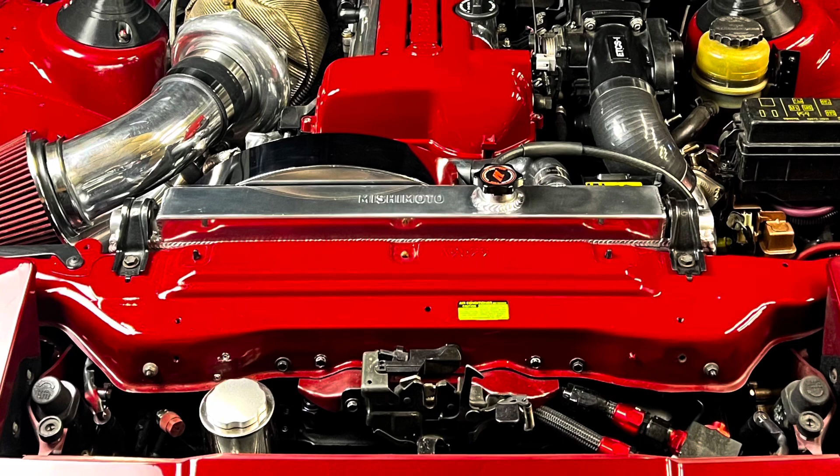When planning my ultimate Supra build, I struggled with balancing the nostalgic and original design of the car and adding newer amenities. My goal is to take this car, make it reliable, fast and fun, and also keep the feeling of a comfortable grand touring vehicle.

Keeping the factory air conditioning, making oil changes a breeze, and cooling the oil equally as well as the factory Aristo oil cooler did.

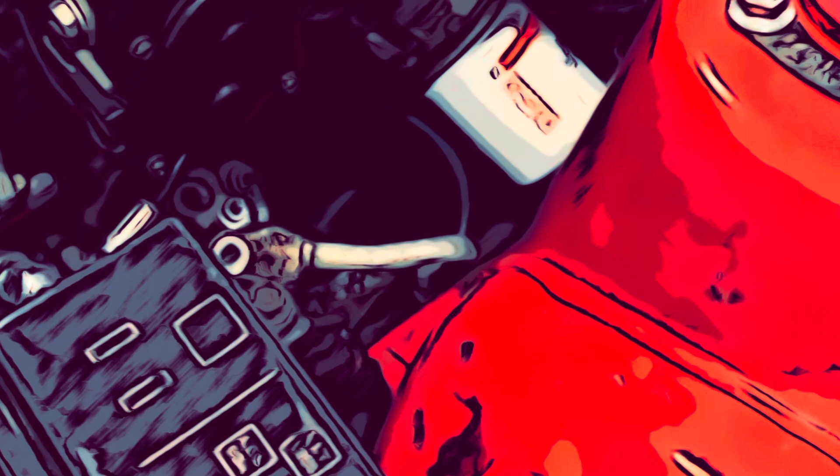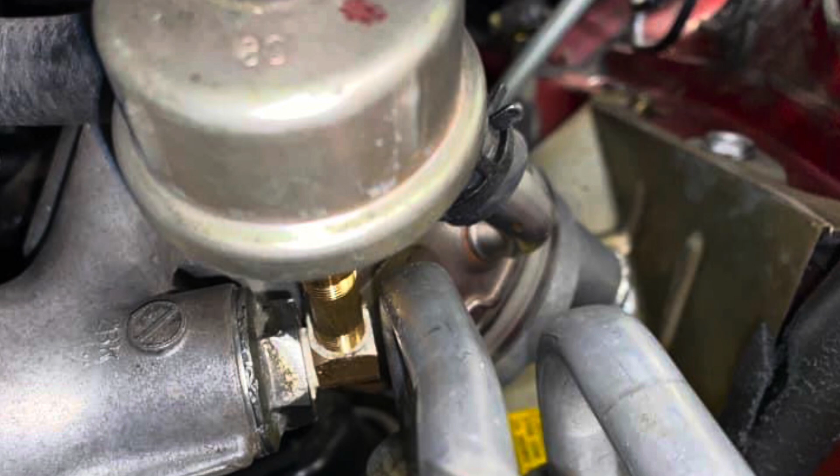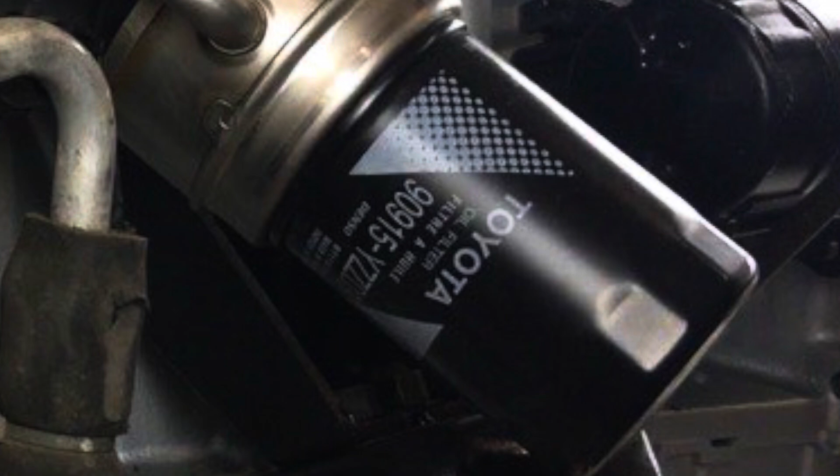When planning the 2JZ swap and looking at the factory Aristo oil cooler, I could see there was going to be a little bit of conflict with space in changing the oil with the oil filter, running the AC lines, and just having room to work in this area. There's also a guard for the steering linkage that the filter butts right against. Pair that up with using a slightly larger than factory oil filter to get a little better oil filtration, and it's just a recipe for frustration and oil spills all over the place when you're doing an oil change.

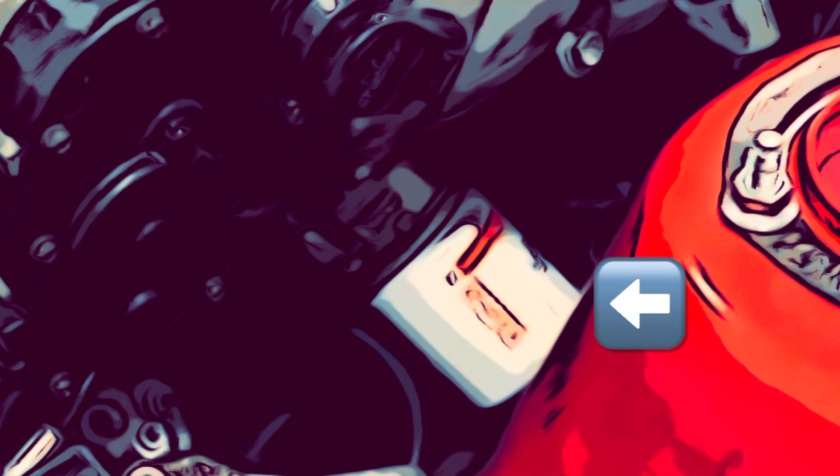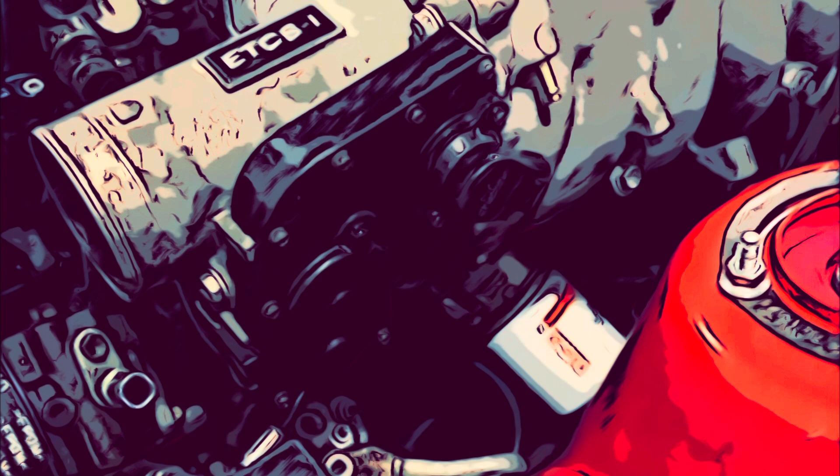This oil filter might look like it's really easily accessible, but what you're not seeing here is the power steering fluid reservoir and other wiring and hoses that are in this area. It really just doesn't look very inviting to me.

I just want to make this vehicle really easy to maintain and enjoyable to drive overall. So now I have to put my thinking cap on and try to make this build as reliable as possible.

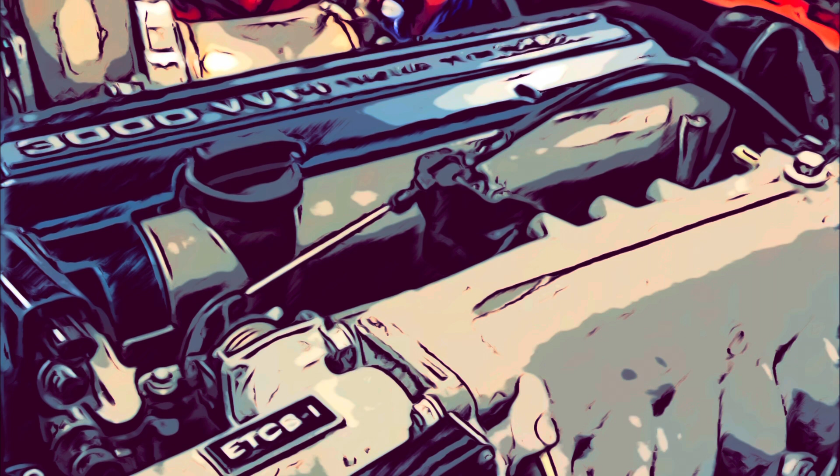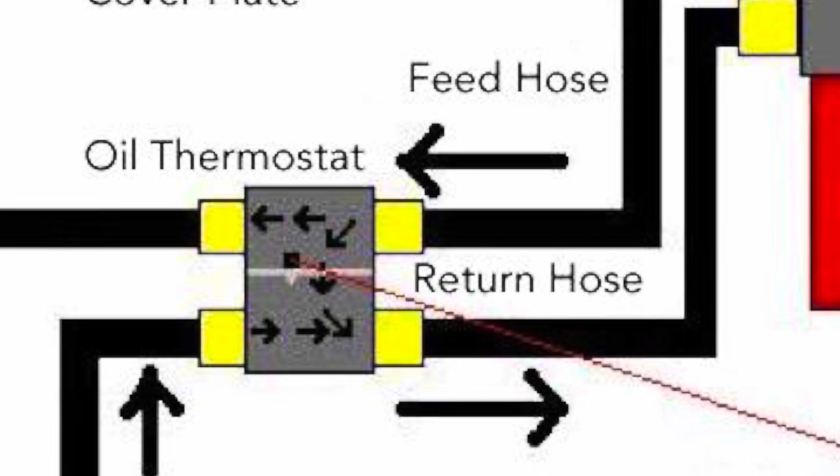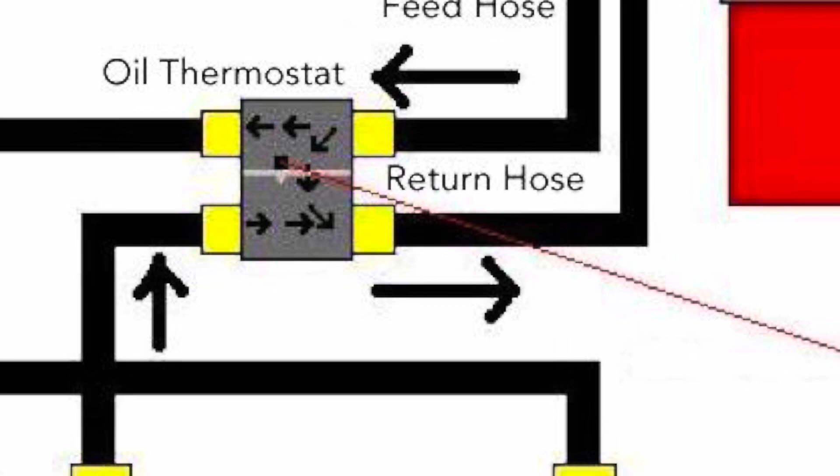As you may know, one of the disadvantages to using an oil cooler is when you're in colder climates, your oil thickens, and the passages in most oil coolers are fairly small. You want to prevent oil starvation in your motor. So when thinking about this, you want to add a thermostat that allows oil to flow and bypass the cooler when it's cold, and when reaching optimal temperature, open and allow oil to flow through the cooler, cooling the oil and no longer restricting any flow. No oil starvation, cool oil - two very key components to keeping your motor happy.

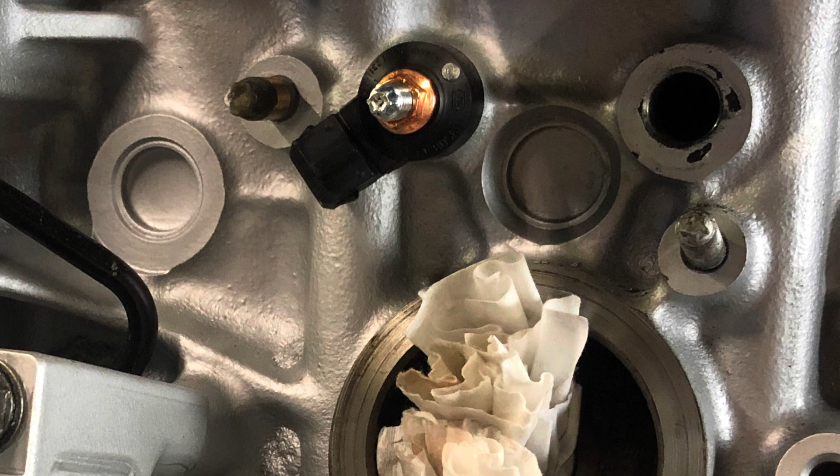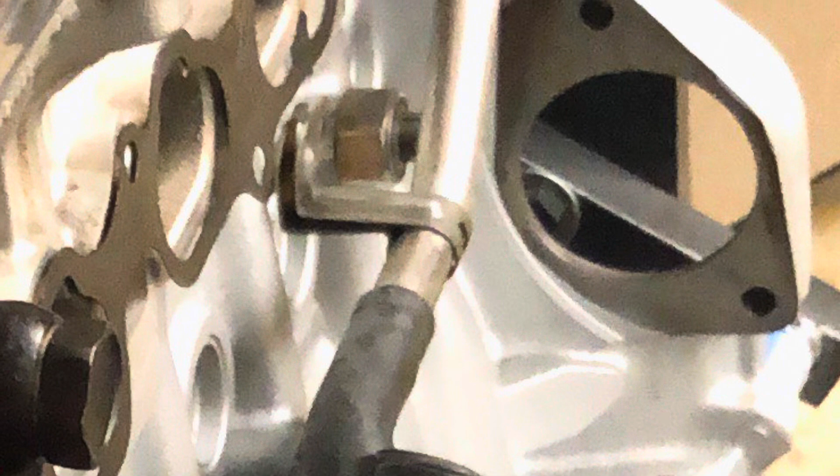Once removing the factory Aristo oil cooler from the 2JZ, you're faced with a port that is a return feed for the coolant, as well as a supply that originates from the water pump.

One of the other things I wanted to also bear in mind was being able to order the factory coolant lines and have them all fit, without needing any kind of specialty lines for this build. I also wanted to keep it looking very nice and trim, and keep all of the hoses minimally seen.

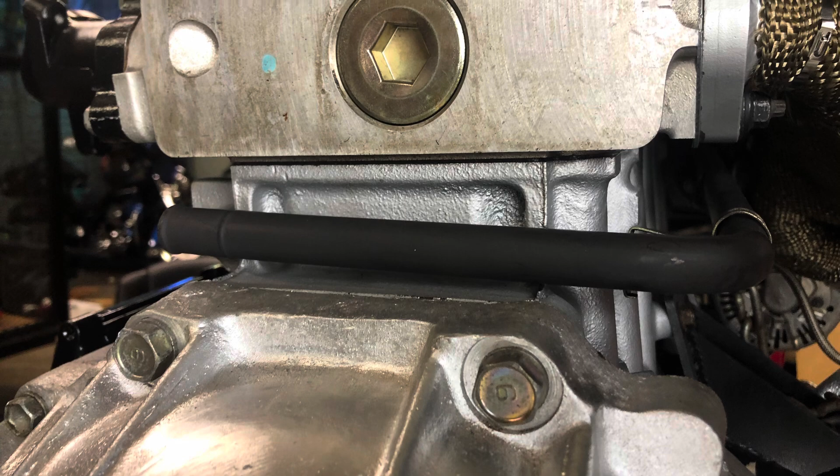So doing this required me to make some hard lines that ran across the hot side of the motor near the exhaust manifold and around the back of the 2JZ block. That way, the factory coolant hose could hook up exactly like the 7M did, and it wouldn't require any specialty hoses. It's also really out of sight.

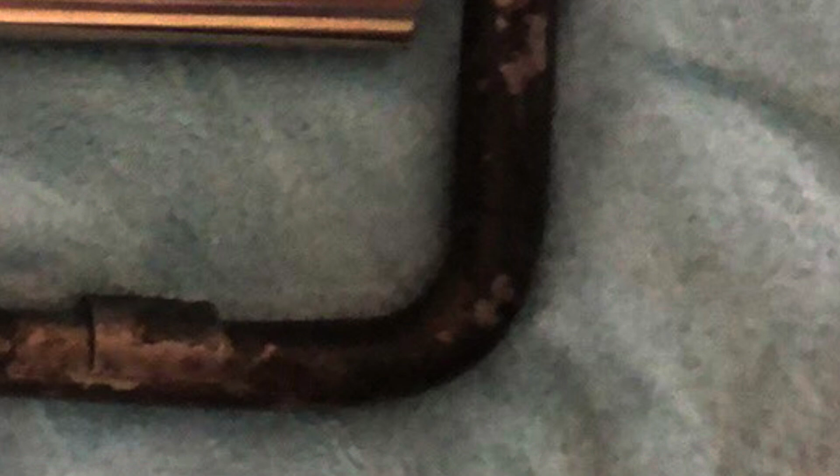To do this, I used the factory 7M non-turbo hardlines that were connected to the water pump. The 7M hardline configuration has two hardlines attached together with brackets. I separated the two hardlines by cutting the brackets, then shaved away the remaining bracket material from the hardline. The 7M coolant hardline was the perfect shape.

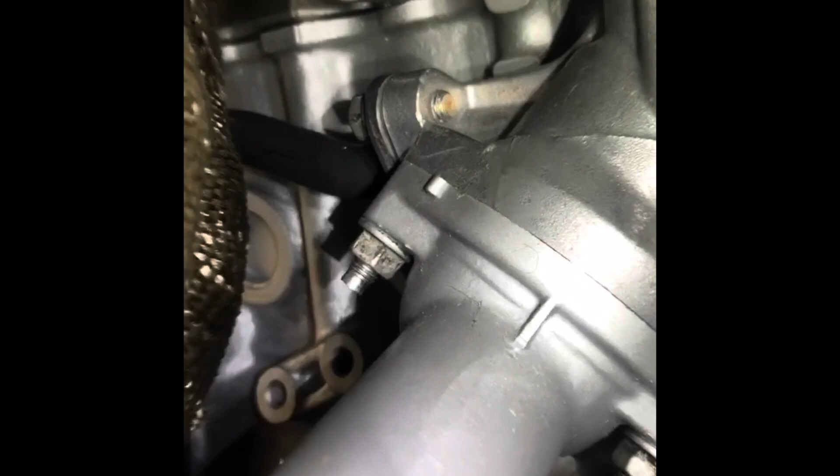However, it was a bit too long, and the 2-bolt flange that connects to the back of the water pump was not oriented properly. I cut the end of the 7M hardline off to the perfect length for the 2J and welded on a new 2-bolt flange for the 2J water pump.

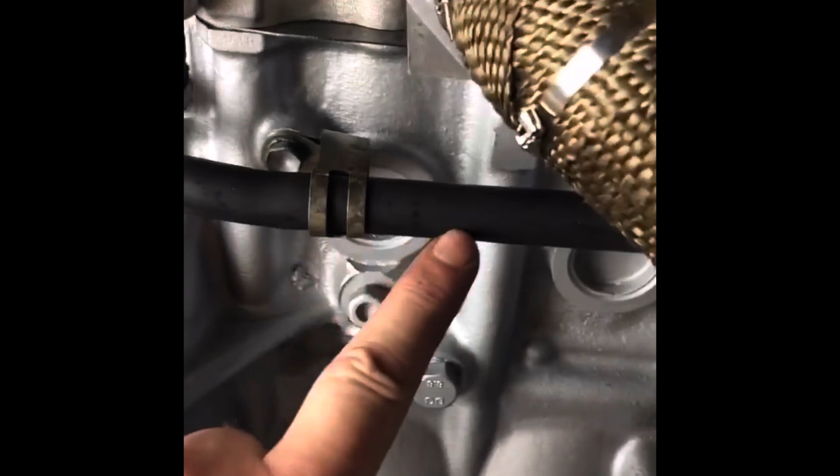I then reused the factory 2J hardline clamps to secure the hardline to the back of the 2J block, and this prevented any kind of vibration and properly secured the hardline to the block.

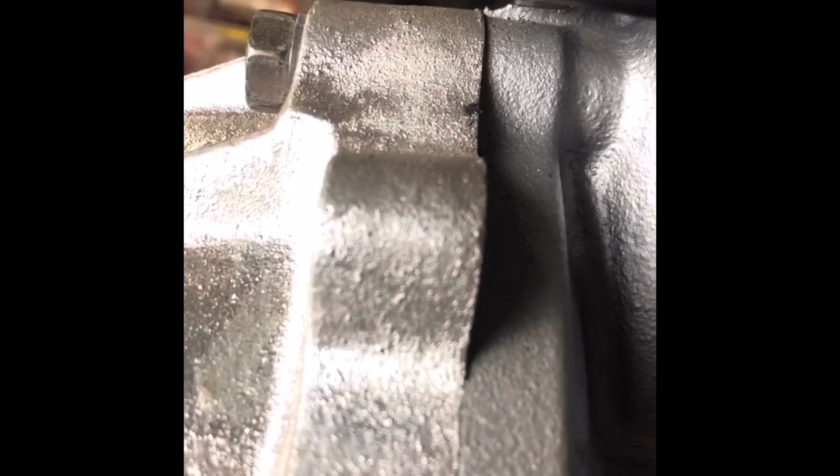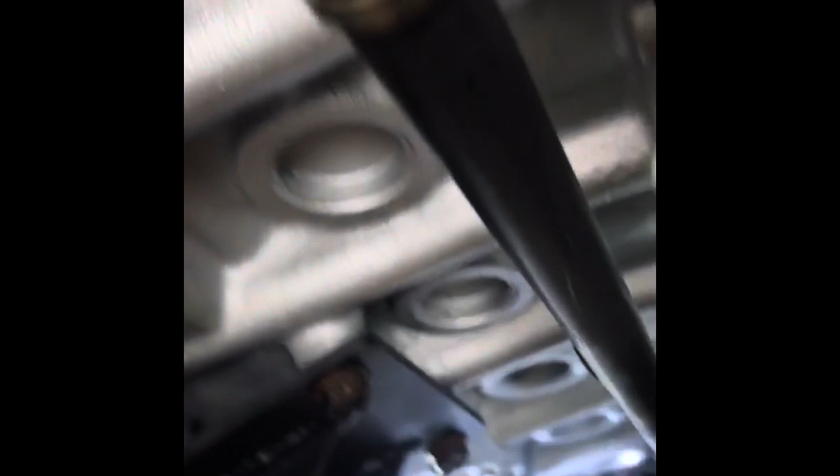I'm also showing you how tight this line is. You probably could have added a little bit more room for clearance. I cut my pipe just a little too short. If I were to do it again, I would probably add just a little bit more room in the back side of the block. I've had it in use for a little over a year now, and it's been working great, and as you can see, it's contoured very nicely to the block and fits very nicely.

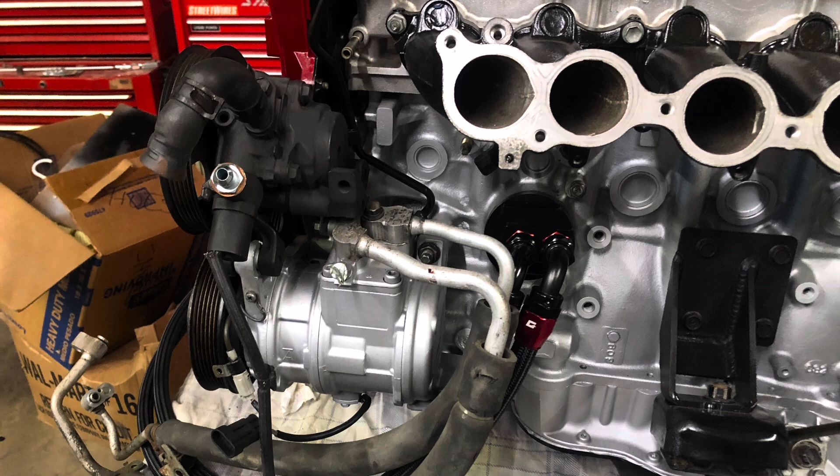To keep this video as condensed as possible, I decided to share air conditioning in another video. Air conditioning lines are going to be very close to this oil system, and I think they play a role hand in hand when deciding how you're going to configure this build.

Next, I'll cover how to install the oil cooler as well as how to install the remote oil filter.

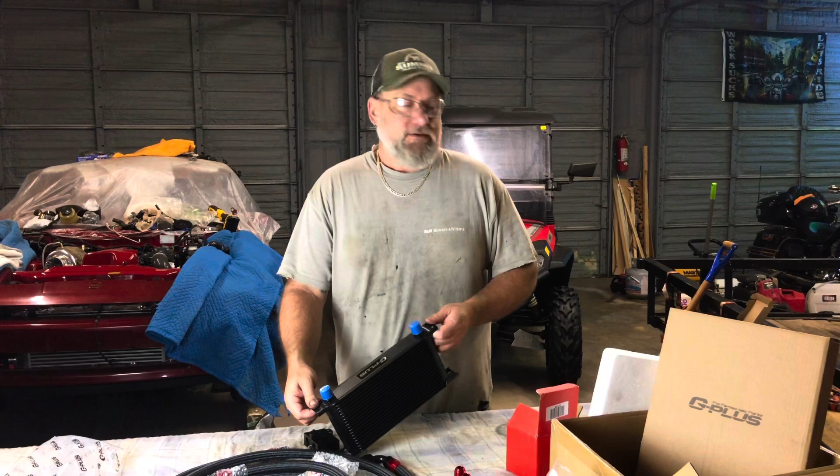Okay, so we're unboxing this G-Plus oil cooler kit. We got it on eBay. It was relatively inexpensive, I want to say around $150. And what it came with was basically two portions of this.

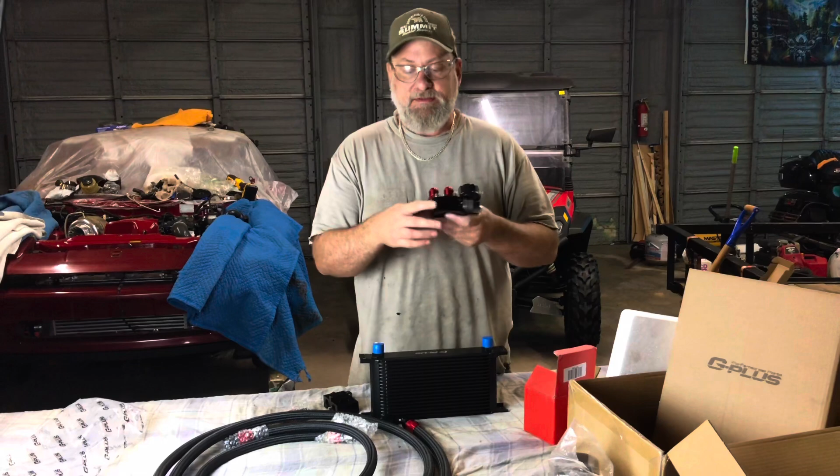There's one that's actually on the 2JZ block right now, very similar to this, but it's on there to adapt the oil filter fittings to an in and out AN10 fitting. So that's currently on the block, as I said.

This is the other section that basically allows you to relocate the oil filter. Since the oil filter was buried in the driver's side fender with the factory oil cooler on the Aristo 2JZ, we decided to go with an outbound oil cooler.

There's a little bit of apprehension that I have, and I want to try to get some fail safes built into this, so anyways, I'll discuss that now.

I do have my pressure sending unit on here, so I can actually watch it on the gauge, make sure I have good oil pressure outbound. I also have a digital gauge that we'll be using for the engine management computer.

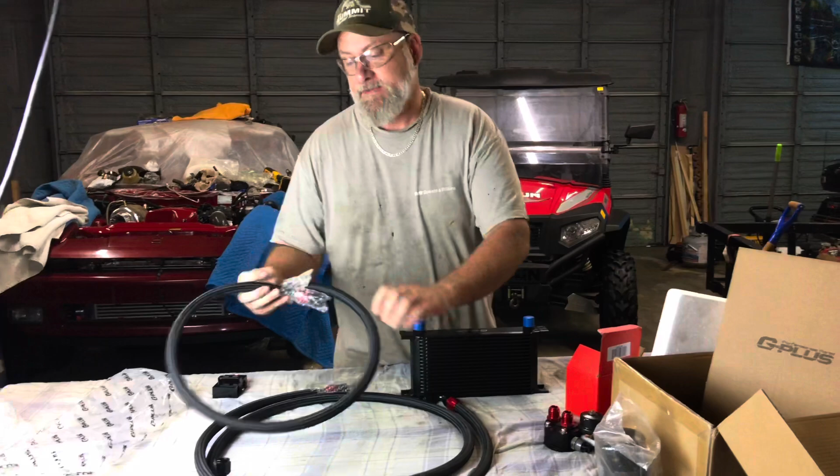So in the kit, again, came 3 lines, pretty high end. At least they seem to be pretty nice AN10 fittings and nice braided lines. So those are there. We'll probably have to change the lengths of them a little bit.

This is a 16 or 18 row cooler. Should be plenty adequate for what we need it for.

And I bought a separate thermostat so that we can promote no oil going through the cooler when the oil temperature is low. So when the oil temperature is not up to temperature, it'll bypass this cooler and just continue to run through the oil filter unrestricted. And then as the oil warms up, this will open up and allow oil to pass through the oil cooler.

So that's a good idea to do when you have heavier weight of oil, as well as a cooler climate, because the oil passages in this are somewhat restricted, and you don't want to in any way inhibit oil flow, obviously, in your motor.

You have a pretty good opening size here, AN10 again, in and out, and I'm not sure what it looks like inside. I really haven't looked in there, but I do know just from feedback of others that using a thermostat in this situation is the best way to go. So that's what we're doing.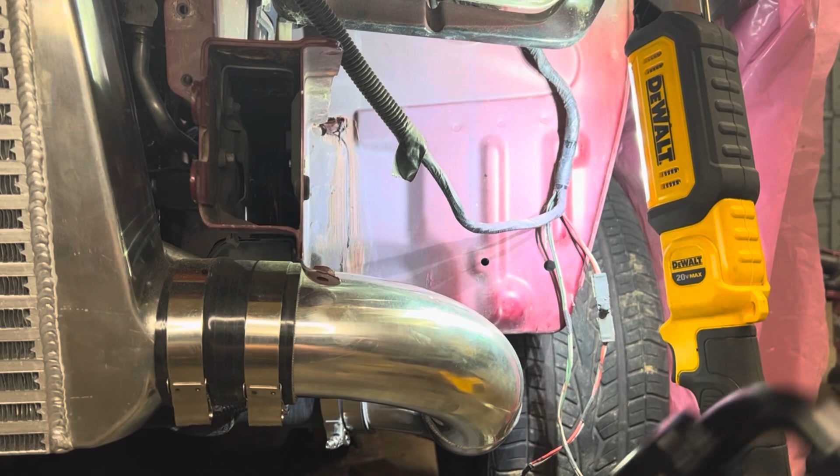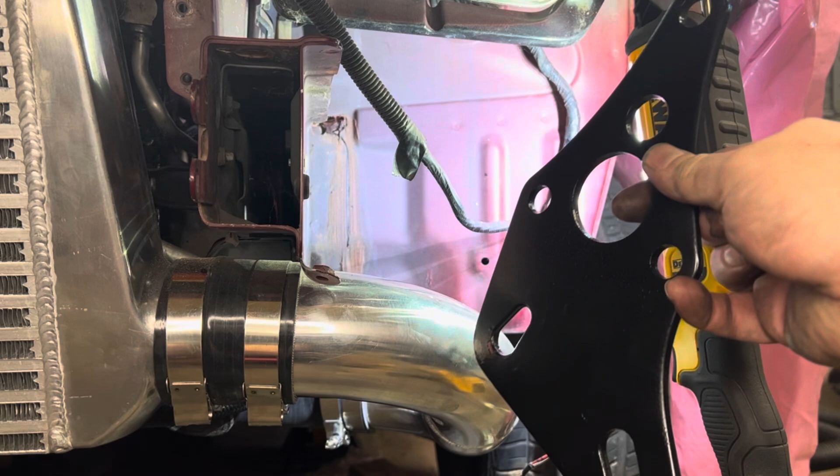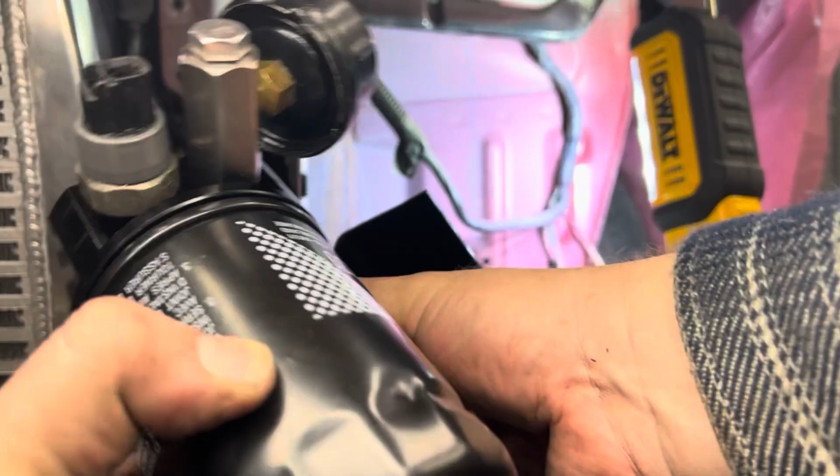So I've been back and forth about where to mount this, where it would be easiest, and so on and so forth. I'm going to have to use some 90 degree high flow connectors. Essentially what I've done is I've taken the factory tow hitch hook here, and I just kind of wire wheeled it off and gave it a good spray. I built this bracket here to be able to mount this so that we can use a filter wrench kind of through here to remove the oil filter.

Some guys have mounted the oil cooler in this little corner here, and I don't really like that because this is the cooled air going into the engine. I don't want to have a mass of hot air in this area. I don't want to warm it up whatsoever. I want to use the intercooler to do its job and cool.

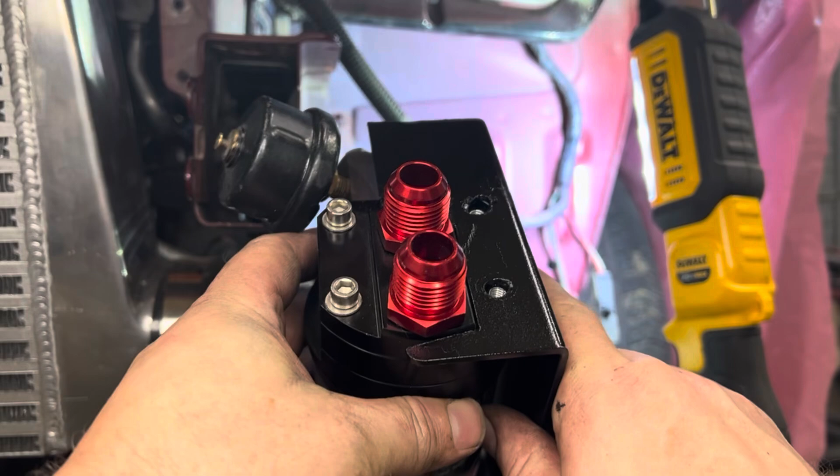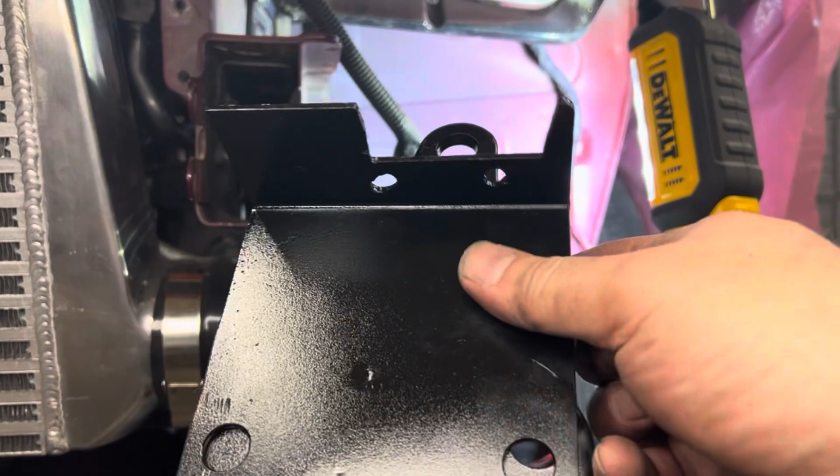So basically, I happen to have some of this angled steel, and essentially what I've done here is just kind of a simple fabrication so that this is mounted here like so. It's as close to the edge of the plate as I can make it, with in mind that we're essentially going to mount it where the holes are. So we're going to mount it on top of the factory tow hook, and I wanted to have this down far enough where I could put the factory bolt in. So I'm going to actually install this right now.

This is a 17 millimeter. So with that being as large as it is, and this being such thick steel, I'm sure it's supposed to have a pretty high torque rating. So I'm going to give it a couple good ooga googas.

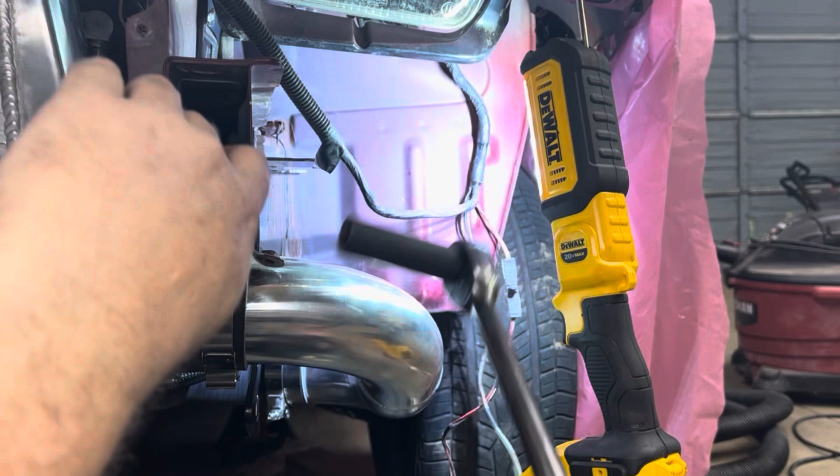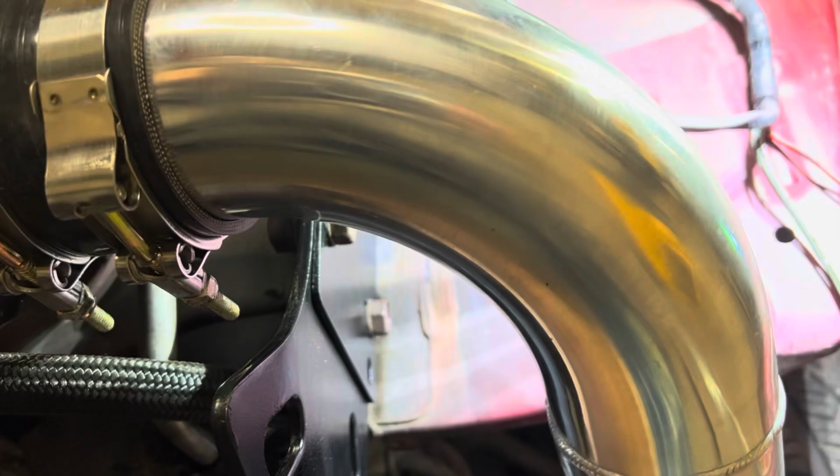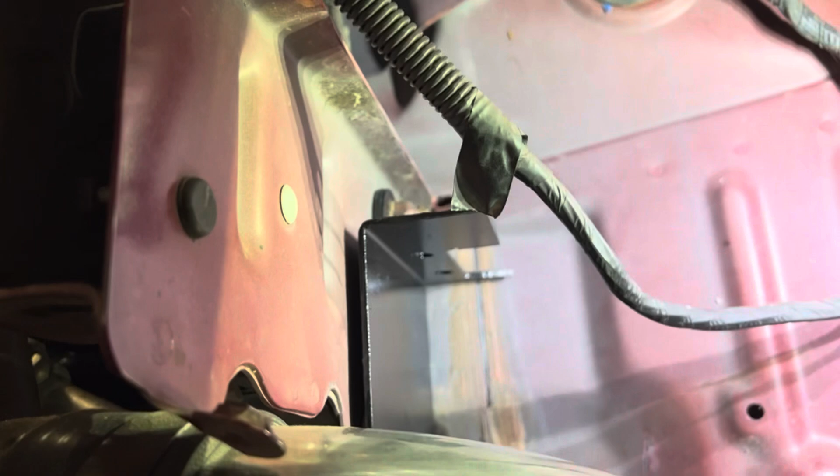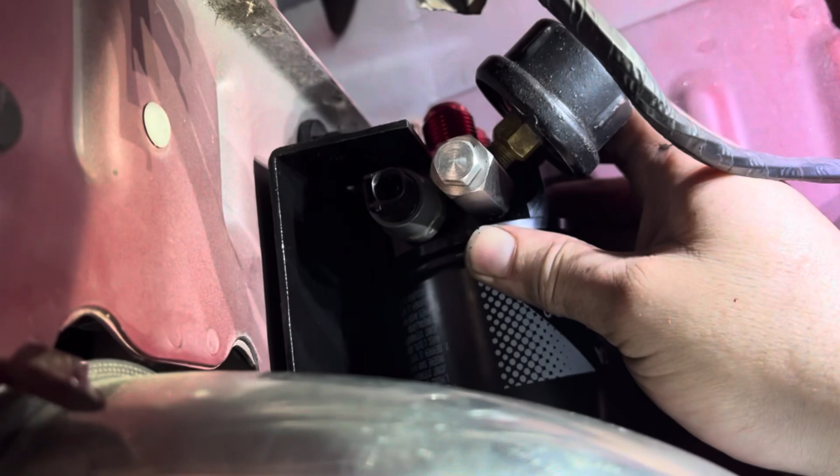Okay, so what we have here, again, a little window here around this elbow with the intercooler pipe. If I can get the... so I got a little, again, let's see, I'll put you back down here for a minute. Better perspective here.

All right, so I'm gonna redo some of this. This is the factory wiring the way it was. I'm gonna make all this nicer and probably route some more wiring, some upgraded horns for the front here. So I've got a little bit more wiring to do. I'm also going to run some wires to these front sensors here.

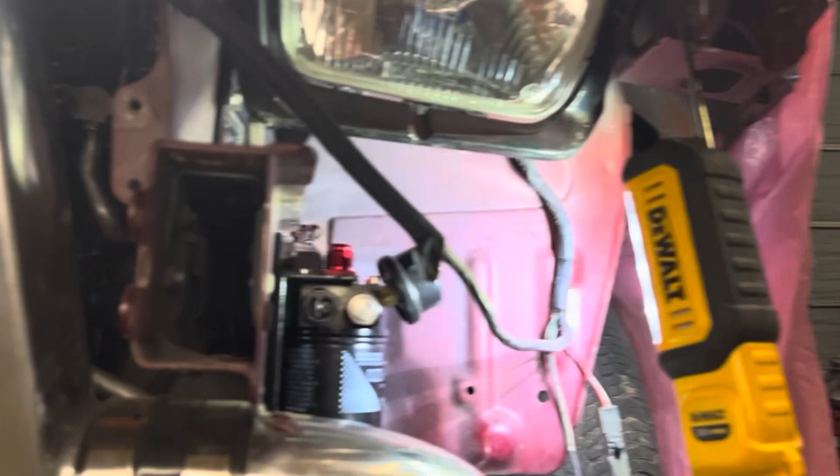Essentially, that's what it looks like right here. These AN fittings are gonna be pretty tight in here, but it's actually going to probably work out just the way I want, where the lines will actually fit nice and tucked away right here on this upper portion, and they'll stay clear of the light.

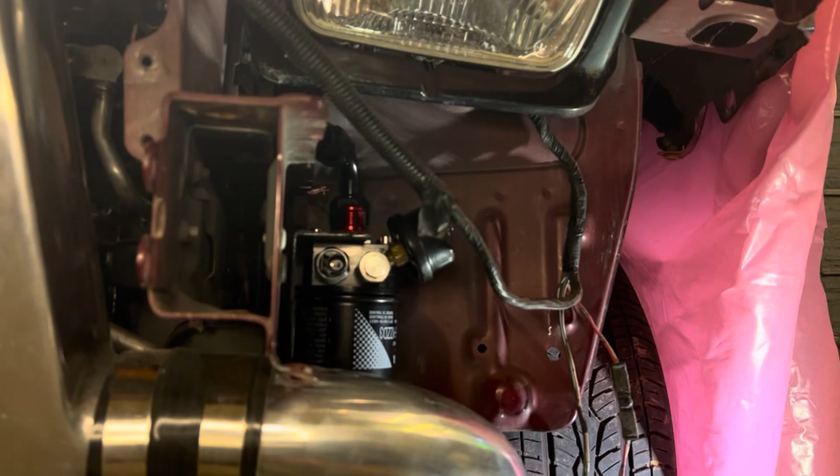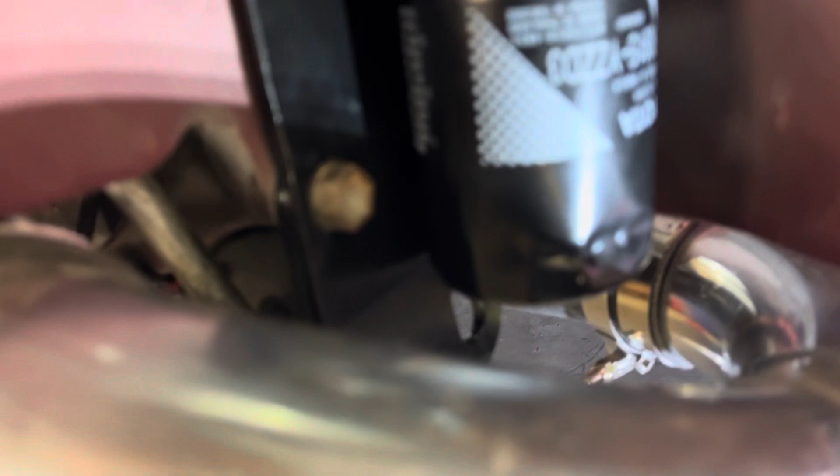So basically what I'm thinking is, I'll show you here in a second. I'll grab a wrench. Essentially what I want to do here is take this guy and be able to spin on and off the filter. Be able to, from underneath, come in here and spin this filter on and off when I'm replacing the filter, and have something nice and beefy to change the filter with.

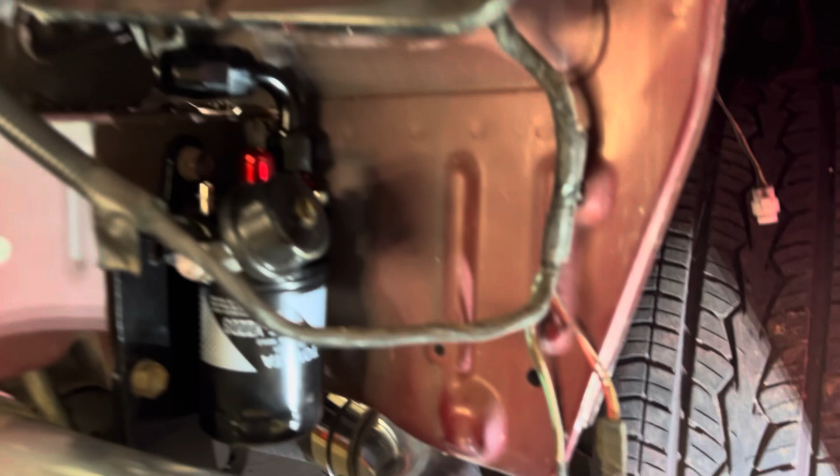I've obviously tightened down this upper hardware, but it's going to be nice and it's not going to go anywhere. Safe from hitting anything or rubbing anything in a collision. It should be tucked away in a nice area. Again, I'm just concerned about losing oil pressure. Once that happens, we're going to toast the engine pretty quickly.

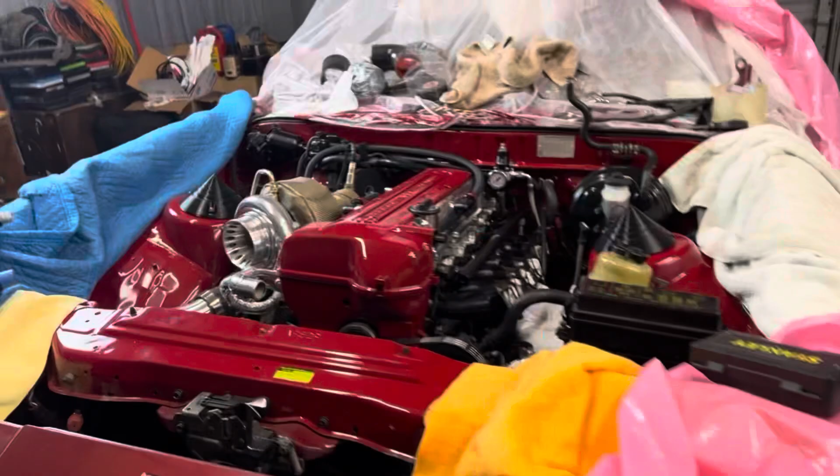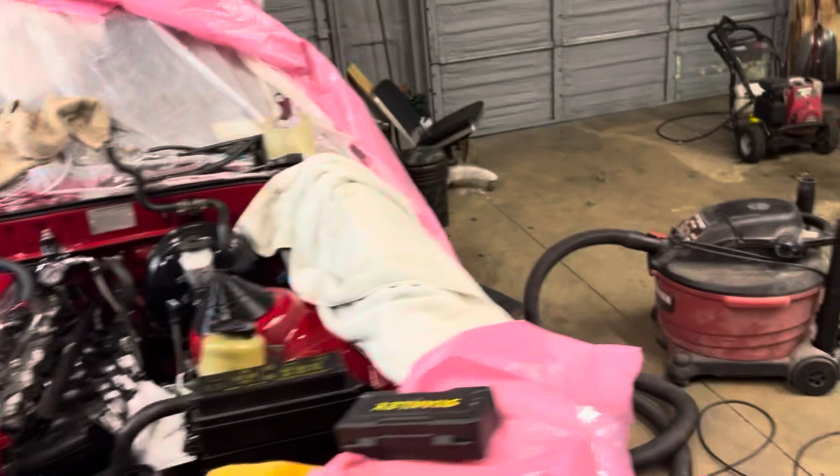Also, I just added a fuel pressure regulator. I kind of mocked up the catch-can lines just to see what it would look like with the fuel pressure regulator. And that's essentially how I have the fuel pressure regulator installed. A lot of people install it in this general vicinity, but I don't think they install it exactly like this.

The only bad thing I'm going to run into is, when I run my wire on this top portion here, it's going to have to rest somewhere here. I could always grind these flat if I want to, and just let the wire molding ride on top of that, and that would be fine. I went back and forth about where to place this. I kind of like it here most.

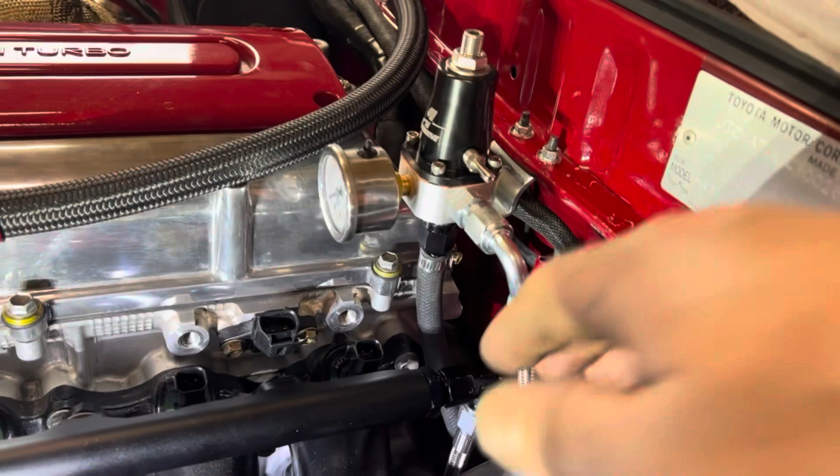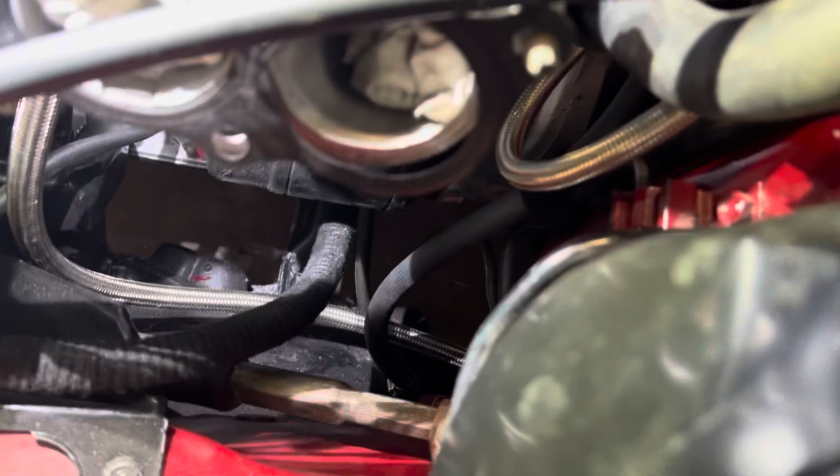I've got the return line going back to the fuel tank. This is the kit that you can buy from Drift Motion. Let's see. I cut the line. It's basically connected down there. It's the return line. Goes down to that busy intersection. You've basically got this black hose, which is the return.

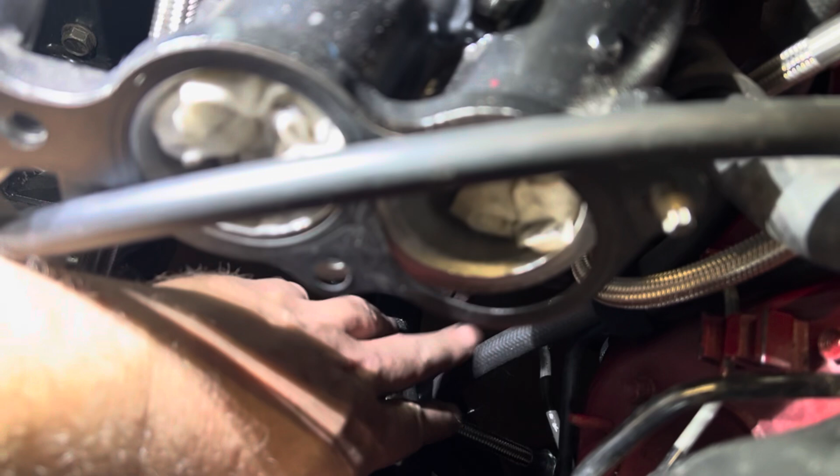It's right here, going to the bottom of the fuel pressure regulator. All the excess pressure above 42 PSI goes out this hose and back to the fuel tank. We also have the AN line from the back of the Radium manifold into a 90 AN 6, and then into the side of the fuel pressure regulator.

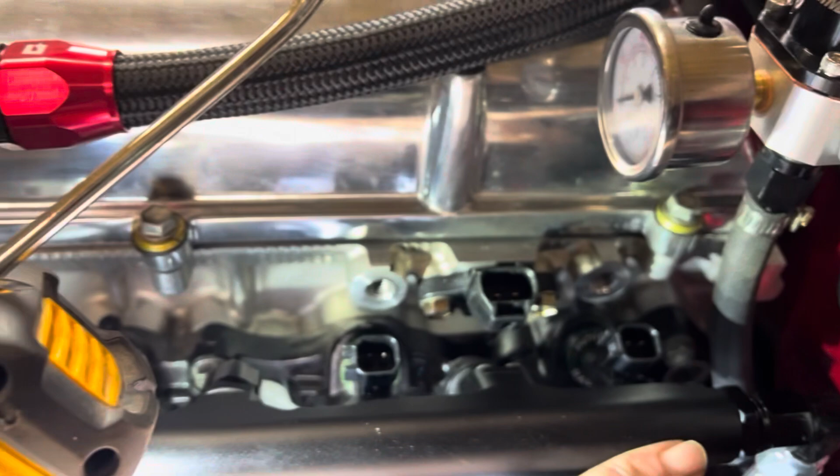Essentially I'm trying to get all this stuff knocked out so that I can start wiring. I just want to run the wire around all this stuff when I make my harness, and keep it clean.

I kept the factory Supra plate here so that it looks nice and keeps it OEM looking. I've seen a lot of people bury stuff in front of that, and I'm going to try to avoid that.

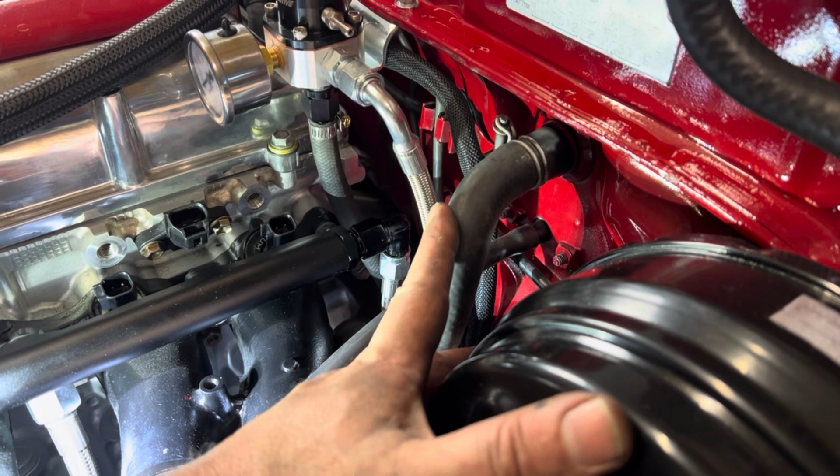I found a good condition coolant line, and this is, I believe, the return from the heater core inside. As you probably recall earlier, I went through great lengths to replicate the connection in the back of the block.

Let's see if I can get a good peek. You can barely see the clamp down there staring at you, that's basically where it's being fed from. It goes all the way to the back of the water pump on the other side, on the passenger side of the 2JZ, so that's a direct shot.

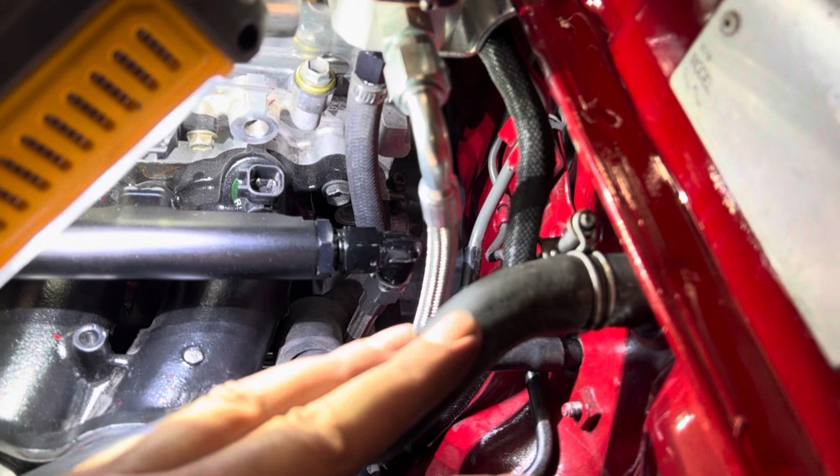It essentially goes right into this hose, just like the 7M did, keeping all the coolant pretty much factory, just like it was with the 7M.

As you can see, I've got what would have been the factory oil cooler return line in the side of the block there. I've got a coolant sensor, which is going to be for the factory gauge in the dash. I'm going to use a different coolant sensor for the ECU.

There you can see my plate for the oil, with the middle being the return line. It's connected right now with a 90 high flow AN fitting, AN 10. I'm going to start running those as well and install the oil cooler, which I have over here.

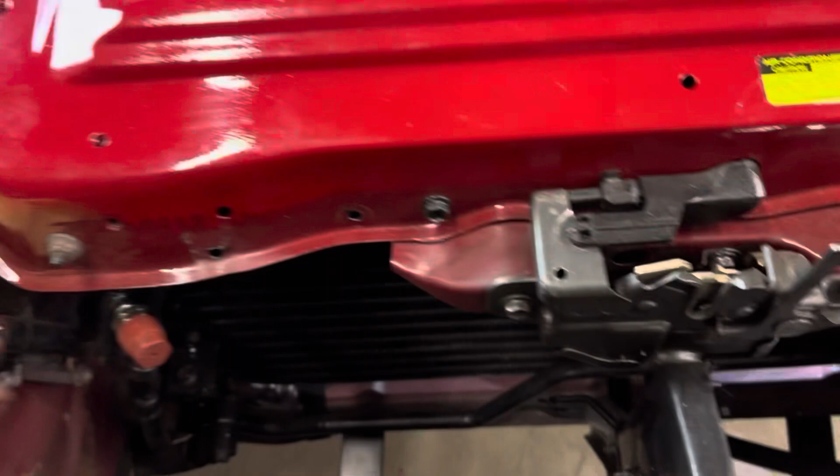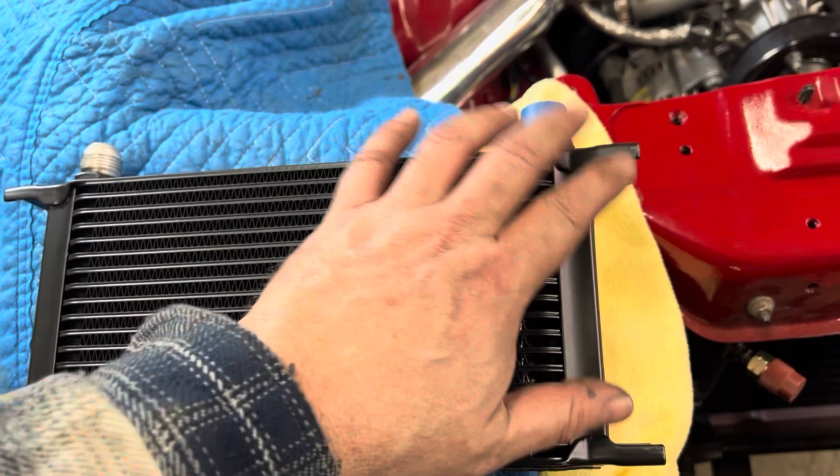I'm going to probably put this oil cooler down in here. I started making some brackets and drilled some holes here, equal distance, so I have good mounting tabs that I've built for the top, but I'm a little concerned about this compression fitting at the top with this plate and vibration.

So I'm definitely going to want to anchor the bottom, and that's kind of where my problem is right now. I've got to find some way of anchoring it to the bottom of the radiator support without rubbing the air conditioning lines.

No, that isn't rust, that's factory undercoating. It's actually a pretty rust-free car.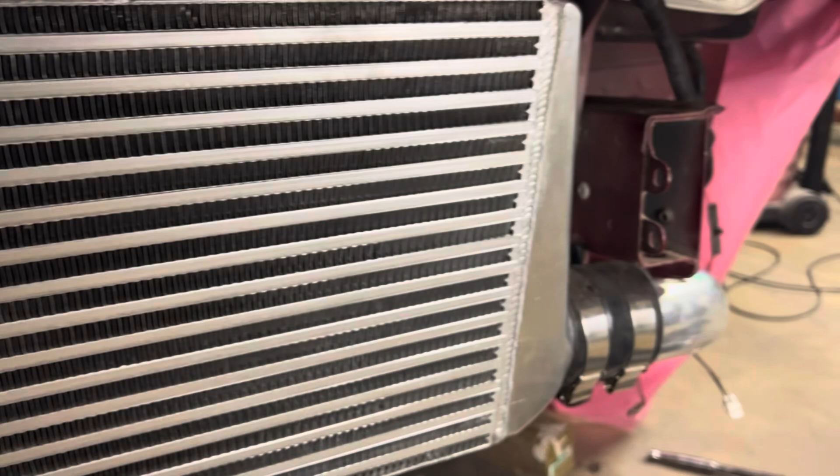That's about it for now, but pretty good progress today. I'm pretty happy with how things are going to turn out. Again, I really like how this is going to tuck away.

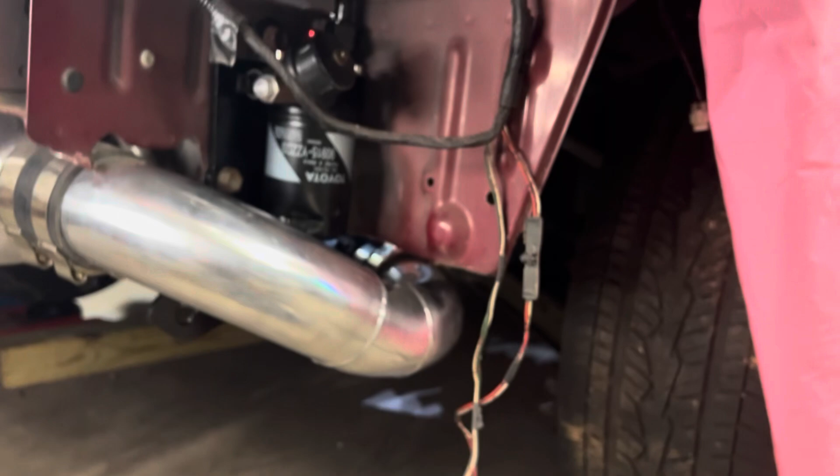So we can just basically put our wrench on here, a ratchet. It's my buddy's Harley Davidson, but you can buy any brand. Oil changes are going to be a breeze.

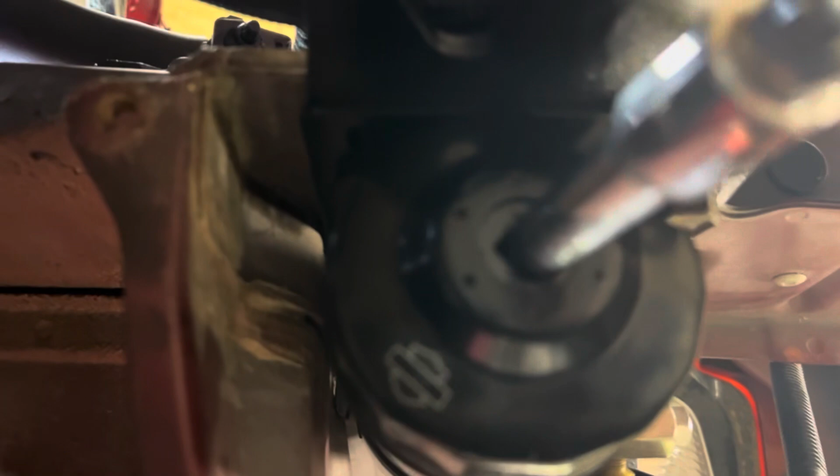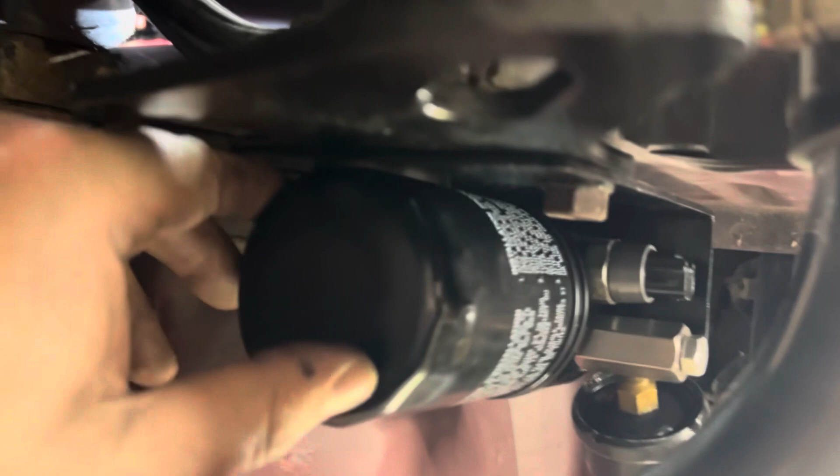I just didn't like the way that the factory Aristo oil-cooled oil filter location was really buried, and it really just didn't allow you to do oil changes very easily, in my opinion. And again, I got to tighten that down.

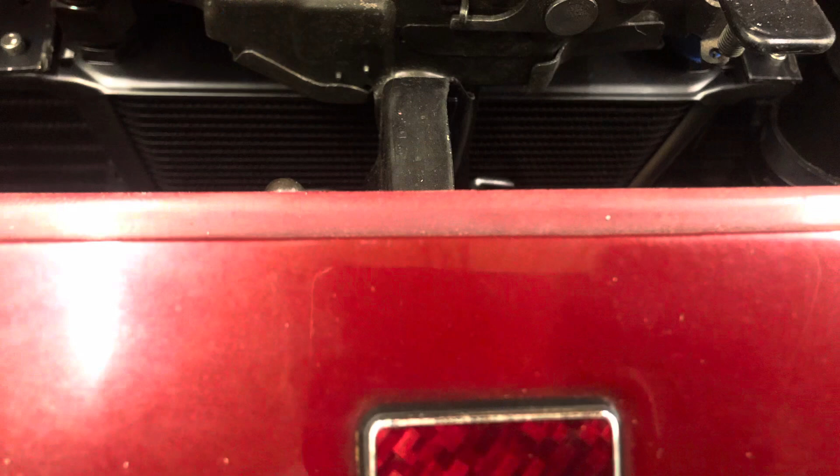After this, I apparently didn't capture any video of installing the oil cooler or the thermostat, and my apologies for that. So the best I can do is share some photos with you of the brackets that were made and how the oil cooler sits in position.